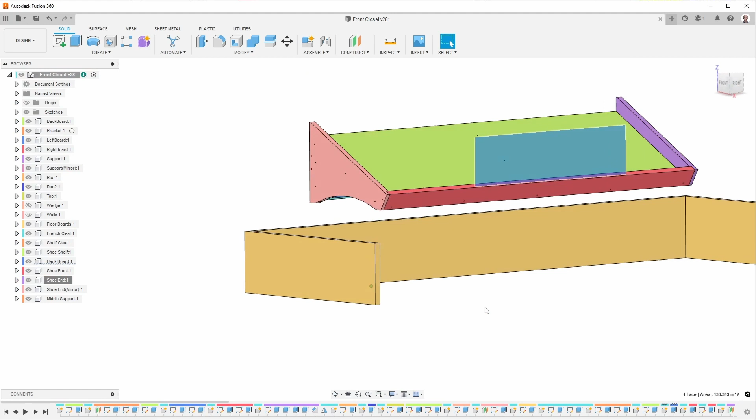So there's a lot going on here, and this is also driven by some parameters, as you can see here. So what I'm going to do is start from the beginning with a new file and then walk you through how I would create this with what I know now.

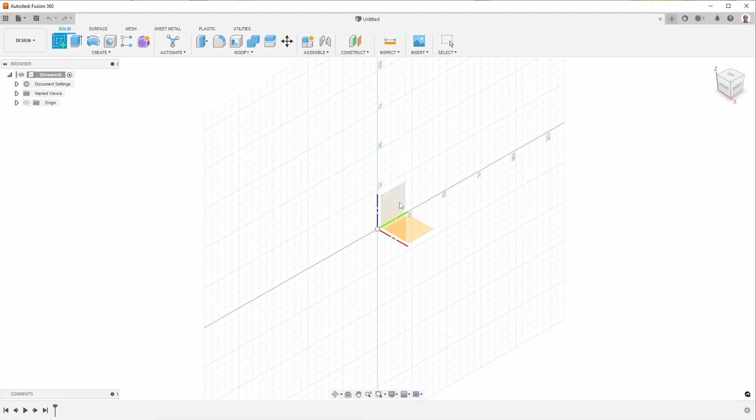The floating shelf is held to the wall with a French cleat. So I'm going to start by modeling the French cleat, and then I'll model everything else relative to the French cleat. So I created a sketch and I just chose one plane. It doesn't really matter which plane you start with. The other thing I want to do is, before I start drawing anything, change this to inches.

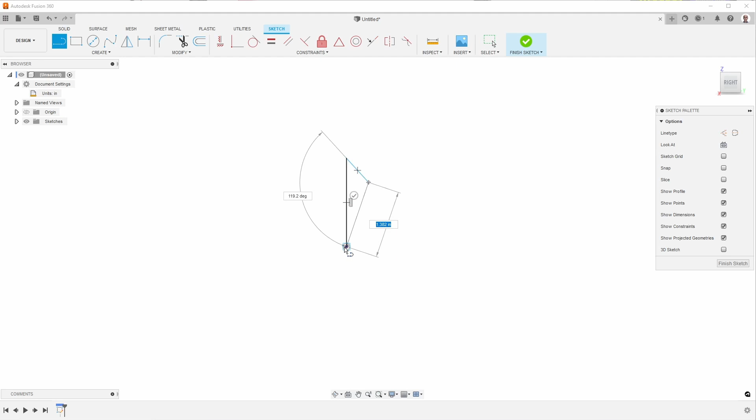And a French cleat is basically shaped like this. And what I did here, so that this will align here, is I hover over it and then move over here, and this will make it vertical. And then I can complete the sketch right there. I want to make sure that this is 45 degrees, so I will set that angle right now. And then I want to set some dimensions.

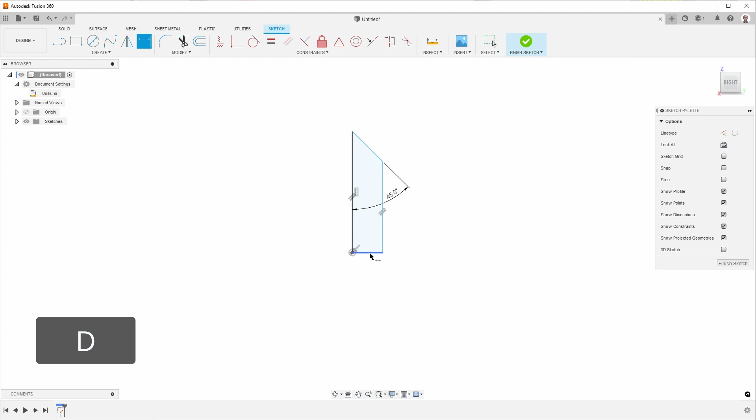Now for the dimensions, I want to start by using a parameter. So I'll create a user parameter called thickness. And I measured the thickness of my plywood, which is 0.7 inches. So I'll use that right there. And that means I can set this dimension here to be that value, like so.

The next thing I want to do is add a point here at the midpoint. You can see the triangle there. That indicates it's at the midpoint. Doing that will allow me to set this dimension to be 3 inches. Why 3 inches? I just thought that would be a good length for the midpoint of the French cleat. So that's why I set it there. So now I have the profile for a French cleat.

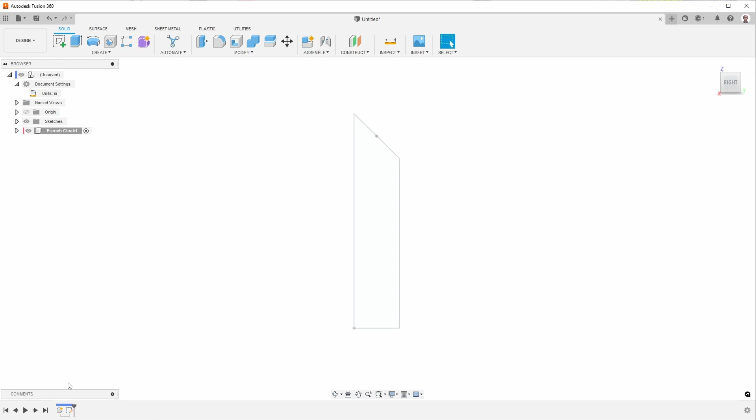Oh, there is one thing I just remembered, so I'm going to go back to that sketch. There's something I often forget to do, which is I want to make this a component first. So I rolled the history back. And now I'm going to give it a name for this component. I'll call it the French cleat. And now I want to move this sketch to be part of the French cleat.

So I'm going to edit this sketch again. One of the things I want to do is I do not want to have a point there because points are fragile. So I actually want to have this be about 1/8 of an inch short. And this is something that I did using my friend's table saw.

Basically, after cutting the French cleat on his table saw, then we went back and cut this off so that it's not a sharp corner, which means it's not going to be fragile the way a sharp corner would be.

The next thing I'm going to want to do is extrude this, but before I extrude it, I'm going to create another parameter, which is the width of the entire shelf. So I'm going to call this the shelf width, and I'm going to make that 48 inches, which is 4 feet.

The next thing I'm going to do, because it's really nice to use parameters, is say cleat width. And I'm going to make that the shelf width. Oops. Let me try that again. The shelf width. And then from that I want to subtract 2 times the thickness, because I keep pressing tab, but I want to press enter.

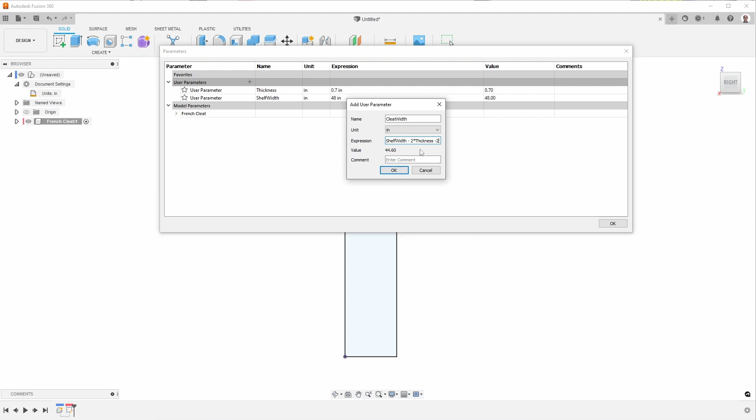And what this will do is, because I'm going to use the same plywood for the 2 outside parts of the shelf, this would make the French cleat exactly the right length for the inside of the shelf. That's a little bit too tight, so I'm going to make it so that we have 2 inches, and what that will allow me to do is to actually move the shelf left and right a little bit in case I want to. So that gives me a little bit of an extra buffer.

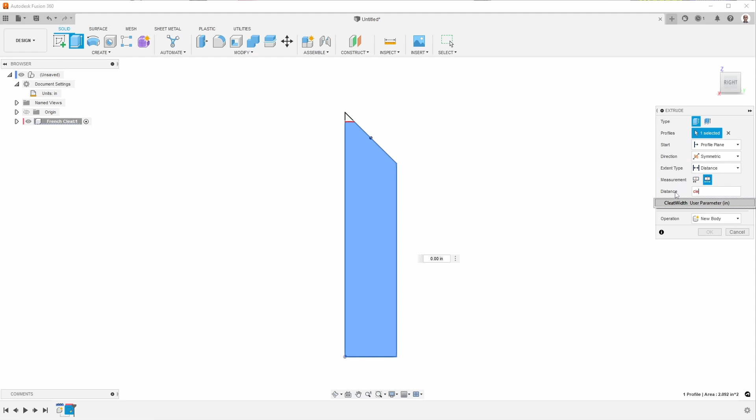So that means I can now go back and I can say extrude, and I'm used to just pressing E for extrude. Then I'm going to select this profile, not including the sharp part. I want to change this to symmetric, and then I want to change this to whole width. And then for the distance, this is going to be the cleat width. And of course, new body. So now, when we look at this, here we have the French cleat. The wall is going to be behind here.

Before I get any further, I should save this. So I'm going to go and say save, and I'll call this floating shoe rack.

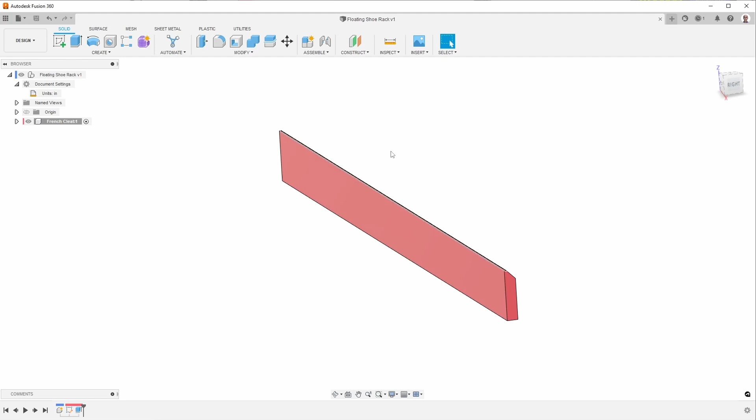Next, I'm going to create the French cleat that is going to be part of the shoe rack. So I'll call that the shelf cleat. And so I'll create a new sketch, use the same sketch plane. The other cleat is not a mirror image of this. It's actually this shape here, rotated by 180 degrees around this center point here.

To achieve that, I'm going to start by projecting. Actually, what I'll do is I'll show the sketch from here. And then what I'm going to want to do is project some of these things. So I'll change the line type to make sure it's on construction. And then I type P for project. I'm going to project this point. And then I also want to project all of this right here.

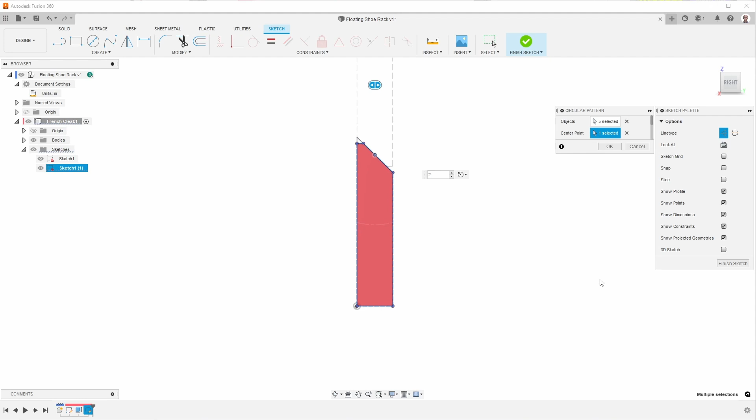Then I'm going to create a pattern. So I'll do a circular pattern. And the object is going to be this. I double-clicked on it. The center point is going to be here. I want 2 of these, and then I don't want that to be construction. So when I click on that, it should turn solid. It did not, but that's okay. I can double-click on that and then click here and make them so it's not construction. So now I have the actual cleat for the back of the floating shelf.

This needs to be wider, and I need an equation for that before I extrude it. I'm going to open the parameters again. The first parameter I want to create is something I'll call dado depth. The idea of this is I'm going to have slots, dados, rabbets, various other things that some of the boards slot into so that everything fits together really nicely. I'm going to make that depth 1/4 of an inch, which is approximately 1/3 of the thickness of the material.

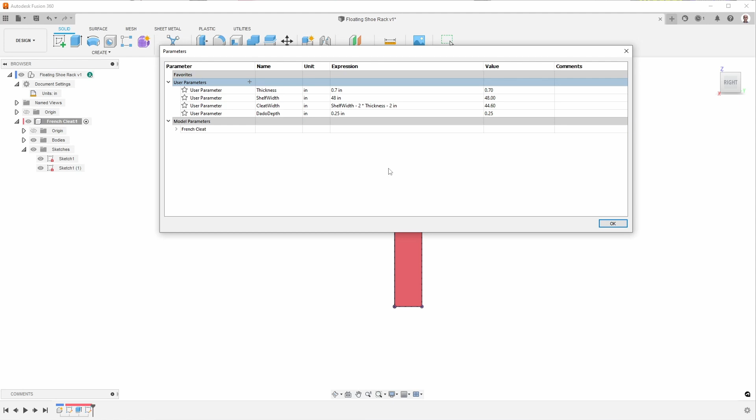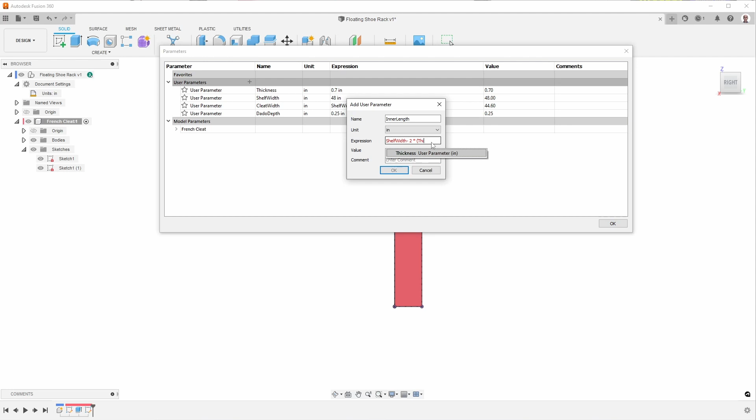And then the length of this shelf cleat is going to be the full length, and then I'm going to subtract the width of the 2 pieces of plywood, but not the total width of those 2 pieces of plywood, because I have to remove the dado depth. So I'll define this new one to be the inner length, and it's going to be the shelf width minus 2 times the thickness of the material. I keep pressing tab. And then from that I want to subtract the dado depth.

And I keep pressing tab because when I'm writing computer software, tab is auto-completion. Alright, so this is going to be the value that we want for the length of this new cleat. So I can then go here and say extrude.

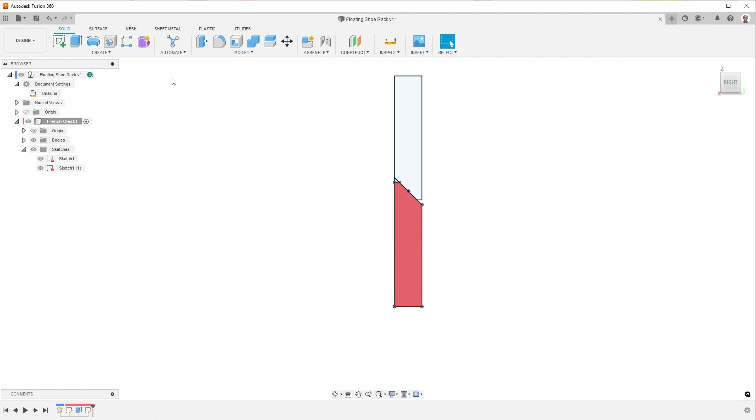Select this. Again, I'm going to change it to be symmetric. Whole length. And then this is going to be the inner width, or inner length. And now, if I turn off the sketch, we can close this. You can see I have these 2 separate boards.

And what I just realized is, again, I forgot to make a component. So I'm going to back up, and with any luck, I will be able to create this as a separate component. So shelf, cleat, and then I want to move forward one, take this new sketch, which is right there, and move it to here.

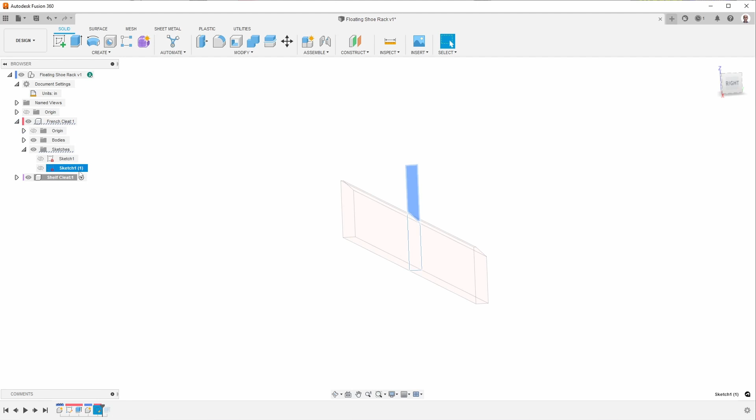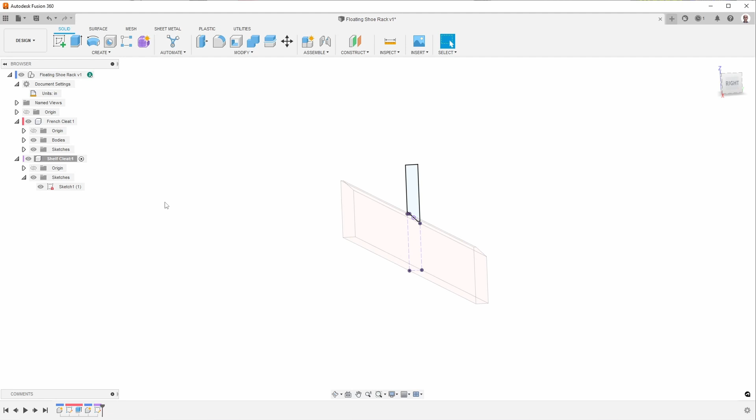Okay, it's not going to let me do that, so that means what I have to do, I'm not sure why I have to do this, but if I delete this, then I should be able to move that sketch now, which I can. So now this is active, and I will make sure that this sketch is visible. I will extrude again. And now all is good.

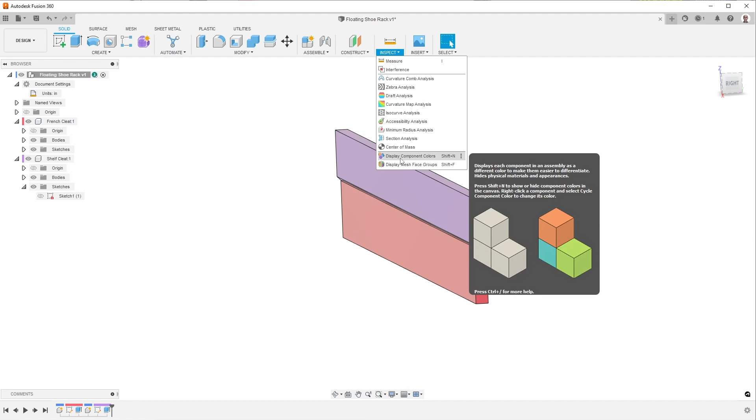Now this, by the way, is one advantage that I find to having the display component colors turned on. I can easily tell when I have not created something as a separate component when I should have. All right, so this is a good starting point. You can see there is room to move left and right.

At this point, what I want to do is start creating the sketch for the end component, for the side, effectively. There are going to be some other boards that come in between, but what I want to do is take the approach of a master sketch. I want that master sketch to be in the right position, so I'll start out by creating the component. Actually, now that I think about it, I'll keep this master sketch up here at the top.

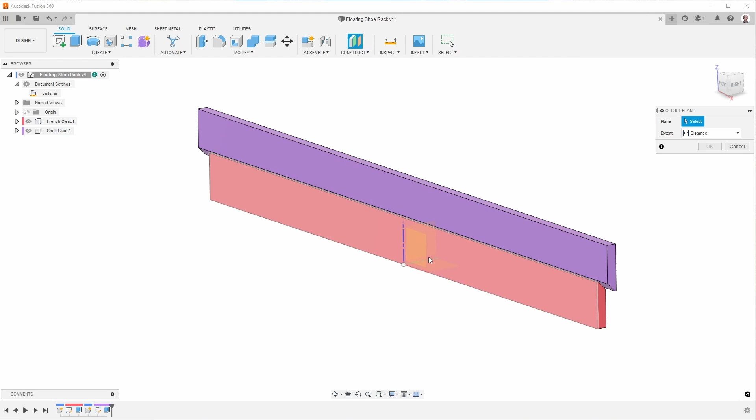So I have this already selected as the active component, and what I'll do is I'll create an offset plane. I want to create that offset plane from here, and then it's going to be the shelf width divided by 2. And that went in the opposite direction that I want, so I'll just change this to a minus, and now it's over there. Then I'll create the sketch on here.

I'll start with the diagonal board on which the shoes will sit, and then the piece in the front. So I'll go ahead and start creating some lines. Actually, I'll create a rectangle, and I'll use a 3-point rectangle. So I'll just get something kind of sketched in here, and then I'll start to add dimensions. So the first dimension I want is here. I want this to be the thickness of the material.

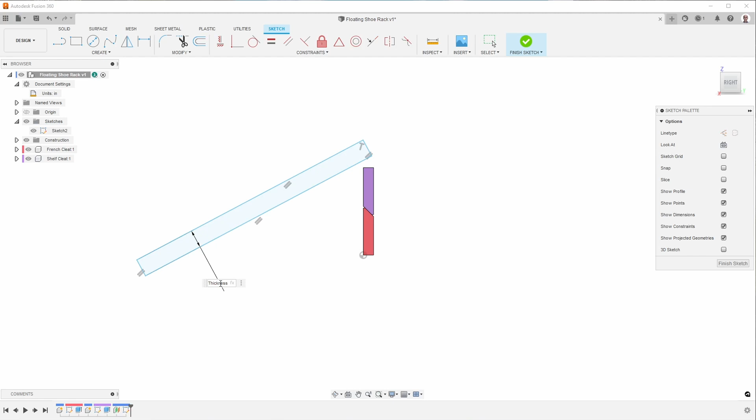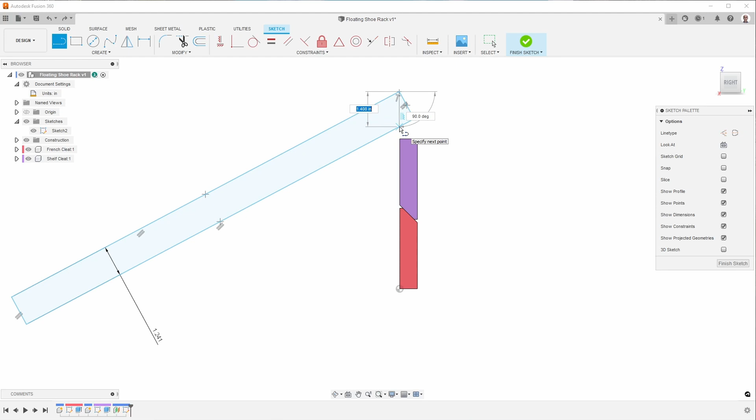Now that I think about it, what I want to do here is have another line that goes from there. Actually, I'm not sure why it just snapped. I'm going to undo. Okay, try a line again, and I want this line to go from here to here. And now that I think about it, I don't want to add the line next. You can see I'm kind of thinking things through. I'm giving you a little bit of an impression of what it's like.

So the first thing I'm going to do is I want to set this to 30 degrees. And so I'm going to just sketch in a line that I can use as a horizontal line. And then I can go in here and say dimension. Let's see, where's dimension? I always press D. So I'm actually not sure where dimension is. So I'll just go ahead and type D again. And then I'm going to make this 30 degrees here.

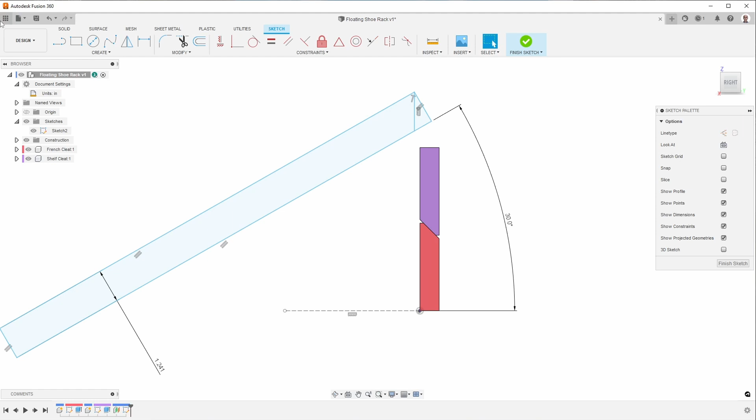Now that I've done that, I can go and add this vertical line here. And I don't want that to be a construction line, I want that to be an actual line. And then I want to start projecting a few things that I'm going to use. So I'll project this line here, because what I want to do is have, I'm going to move this over a little bit.

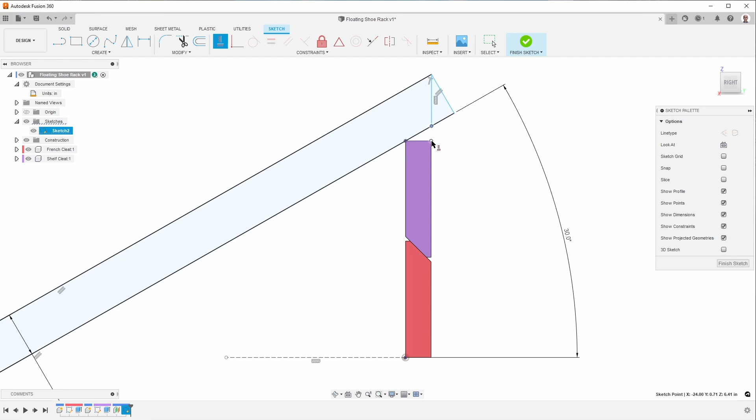So I want this point here to be coincident, like so. And then I'm going to move this over again, because what I want is this point here to be in line with this point here. Because we're not going to keep this on the material, I'm going to cut that off. And so that means the board is going to go like so.

Then I decided, after measuring some shoes, in particular my son's shoes, I'll press D and set this dimension to 14 inches, which is long enough for his shoes. He's 25 years old now, and he's quite tall, 6'2", so he has pretty long shoes. All right, so that's the board here, except I just realized I didn't set this to the thickness. Okay, that looks better now.

Then I want the board here, and when I create that board, again, I'll create a rectangle with 3 points. So I want 3 points, like so. Then I can add some more dimensions. So D is going to be the thickness again.

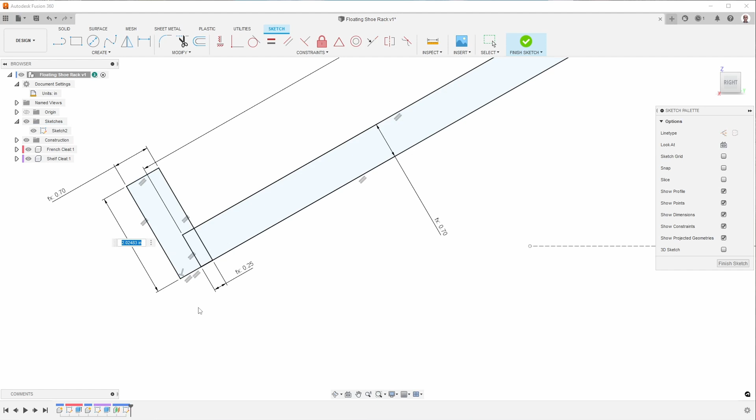So you can see this is going to be the front lip, but I have these overlapping here because I'm going to want to have a rabbet in here for alignment. And so this distance from here to here, I'm going to use the dado depth. So I'm using the same depth for everything. And then for this distance here, I'll just go ahead and make it 1.5 inches, which I think is going to look good, and it'll keep the shoes from falling off.

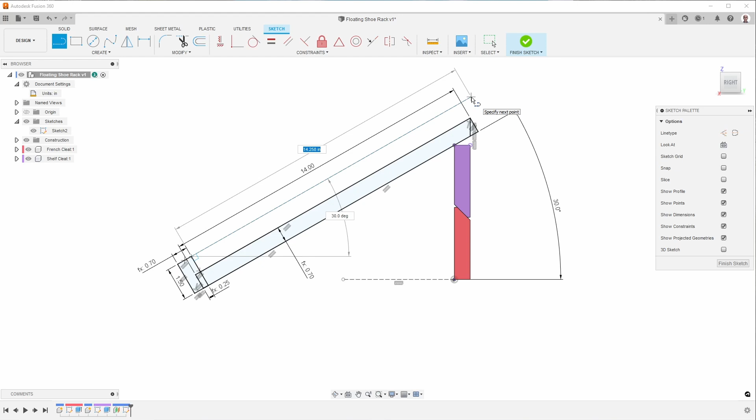Next, I'm going to start sketching out the side panel itself. As I said, these are the two shelf boards. And so I'll go back to line, and I'm going to want to have it basically go up to here. I'll worry about setting everything up later. And then I'm going to want to have it go down to here. So I'll make sure that that all works well, like so. And I said I'm going to do this approximately, so now what I want to do is have these two be collinear. So that's my basic shape.

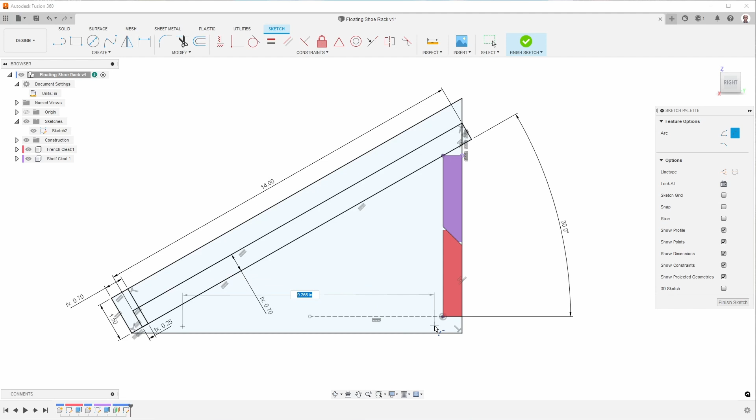But I don't like this straight edge. It looks a little bit boxy. So what I decided to do is to add just a curve. So I'll do a 3-point arc. And I'm going to connect this in a minute. So I'm just going to kind of sketch it in here. And then what I want to do is to have another 3-point arc, which is going to go from there to there. And that makes a tangent.

Yep. And then I want another one to go from here to there and also be tangent. You notice these two parts are not tangent, so I'll go ahead and make those tangent. It's a little kinked at the moment. Ooh, that's not good. Okay, so sometimes weird things happen like that. So what I'm going to do is I'm going to start adding some constraints. So I'm going to dimension this to be about 12 inches, I think I'll call it. And again, weird things happened. So I'm going to delete these and try to add them back in a way that works better.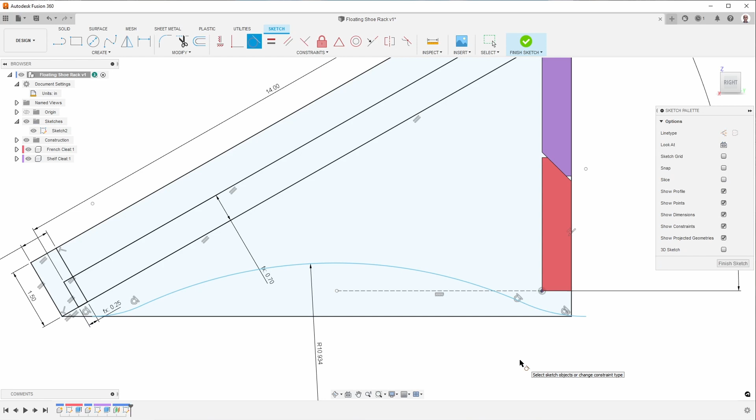So I'll go to the arc again, but this time I'm going to say tangent arc. So it'll be tangent to that. And then I can add that tangency. I can get close and then add that tangency later. Likewise, I'll make a tangent to that. And then this is pretty close. Okay, so now I should be able to make these two tangent. Yep. And make these two tangent. And that's good. I do want to bring this in a little bit. So this is moving things around a little bit.

Okay, now I'm going to add a couple other dimensions. These are dimensions that I figured out after some trial and error. So I made this 0.43 inches. And then I also made this distance here the same thing. So I'll just control click on this, and that copied it to there. So now these two are the same.

Then I need to set a radius for these two. So I'll set the radius of this to be 2 inches. And then this one I'll set to be 2.5 inches. It turned out that for whatever reason it looked a little better when it was 2.5 inches.

So that's pretty much it for the side panels. And we can go ahead and extrude it. That's not going to be the full story, but at least let's do that and get a start. So I'll create a new component. And I'll just call this side. And then I can extrude.

I'm going to have to select a bunch of things. But this is what I want. And then, now, for some reason it's not rotating. Okay, there we go. And what I want to do is make this thickness.

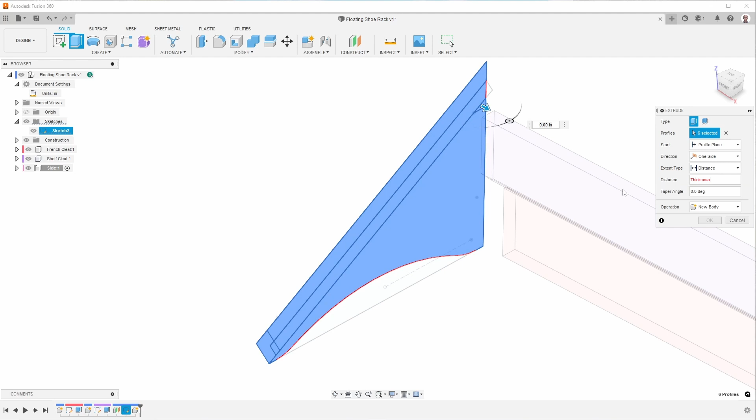Now, if I go here, you'll see that one of the issues is that we don't have the dados in here, and that's okay. What I want to do is finish drawing the other pieces, and then we'll go ahead and add the dados and slots. On second thought, I think I'm going to go ahead and try to just add those slots now, because we know where they are, because we've got the other pieces. And then once we do that, I'm going to use a different technique, I think, to create the boards.

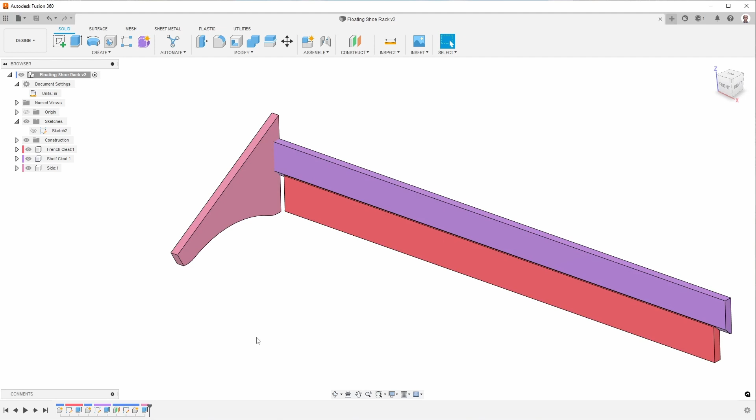So let's go and make the side the active piece. And then I'll sketch on here. And what I'm going to do is I'm going to show this sketch again. And then I'm going to project. Now, you'll see in a minute why I'm doing this. What I want to make is these constructions, so I'll double click on that.

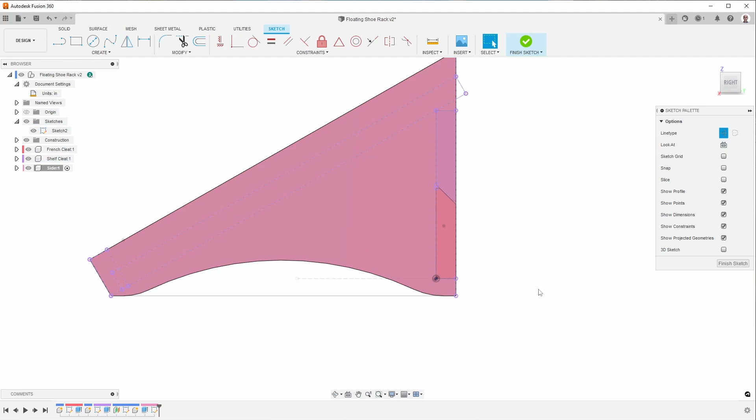So this is where we need one dado. This is going to be a whole thing here, so I'll click on this. And then I'm going to click on these, and then I'm going to need to connect a few things together. And I'll click on this side. Likewise, I'll do these segments here. Okay, so I'll hide that sketch, and actually I'll isolate this so we can just see this. And it's a little hard to see the sketches because of the colors.

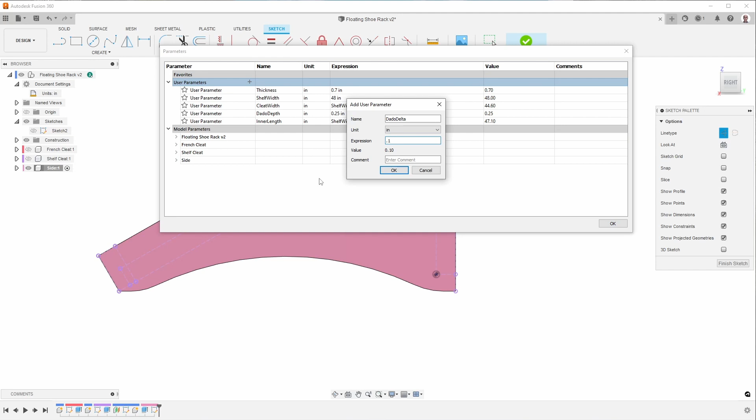The reason I created these sketches is because I want these slots to be a little bit wider than the actual material width, because otherwise I find that they're too tight. So I'm going to offset, and what I want to do is first create a parameter that I will call dado delta. And I'm going to make it 0.1 inches, which is pretty small.

Okay, so now what I can do is I can go to, for example, here. I double clicked and I thought it would select it, but it doesn't know the connection anymore. So I'll just go ahead and select these four, and then I'll say offset, and I want this to be dado delta. And I want to zoom in to make sure it went the right direction. It went outside. This is showing as construction, but I don't want it to be construction. I'm not sure why it's showing up. So I'm going to undo that and then try this again.

So I'll say offset. Select the different ones. Okay, so now that will make the slot a little bit wider. And then I'll go ahead and do the same thing for the other ones. So I'll say offset, and then I want to do these as well. Now that offset went the other way, so I'll flip it, and now I can type. So actually that tells me that I have to do minus dado delta. Zoom in, make sure it's okay. Yes, it's outside in both directions, so that one's good.

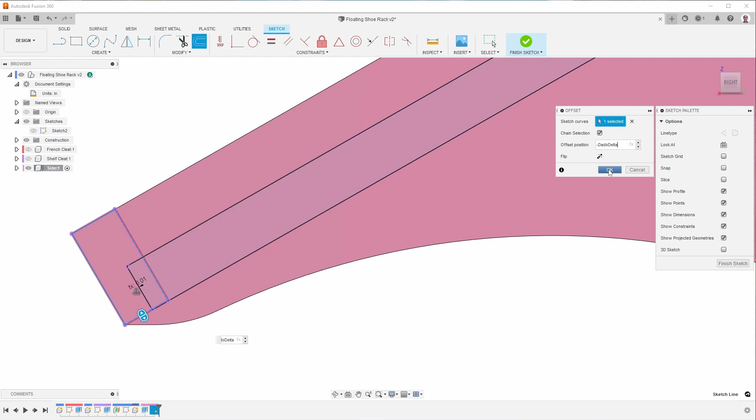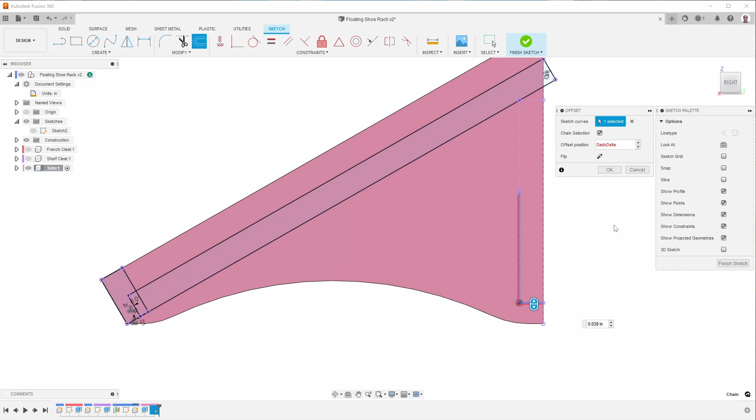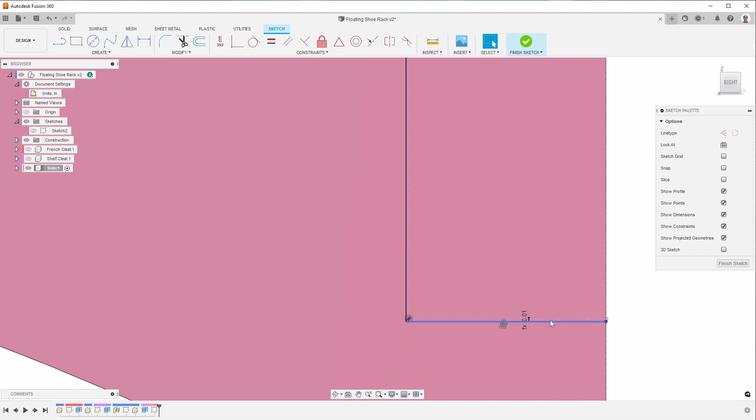And then we want to do the same thing here. So I'll go ahead and say offset. I'll select these. And I'm going to have to connect more later anyway, so I'm not going to do all of the ones that I need. For some reason, I'm not able to select that. So let me try this again. Okay. And it's not allowing me to multi-select. That's okay. Just make sure it's outside. Here are the dashed lines. Yes, it's outside. And then I'll offset this top one as well.

Okay, now it's not complete, so I'll press L and connect the lines, and then connect these two lines there. And that is giving me what I need.

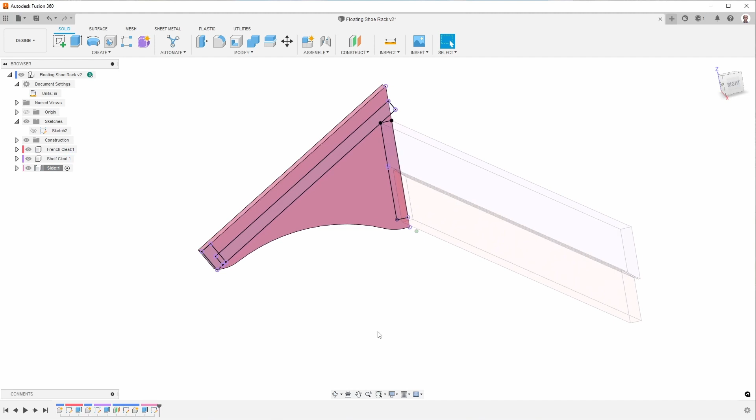Now just remember there's something else I'm going to want. Let me show these, unisolate this. So what I have right now is these two pieces here, and I thought it would be stronger if I had another piece that this was attached to and this is also attached to. And then this piece would also be resting on this.

What I'll do therefore is go back in time in history. I have to go there to my master sketch, so I'll edit this sketch. And as I said, I want another board here. The other board is going to, I'll just go ahead and say rectangle. So it's going to go from here down to not quite all the way.

So I need to project again, so P, and I want to make this construction. I need to pick this up. What that will allow me to do is make this collinear, like so. Then I also want to have this constrained to this here. Didn't allow me to do that. Okay, it was already constrained.

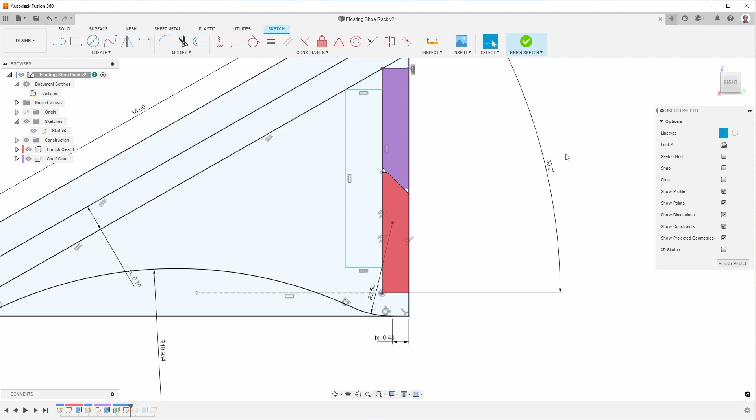So I'll set the thickness of this to be the thickness of the plywood. And then I'm just going to make this a little bit shorter, because it doesn't have to be the full length, so I'll make it a quarter inch shorter as shown.

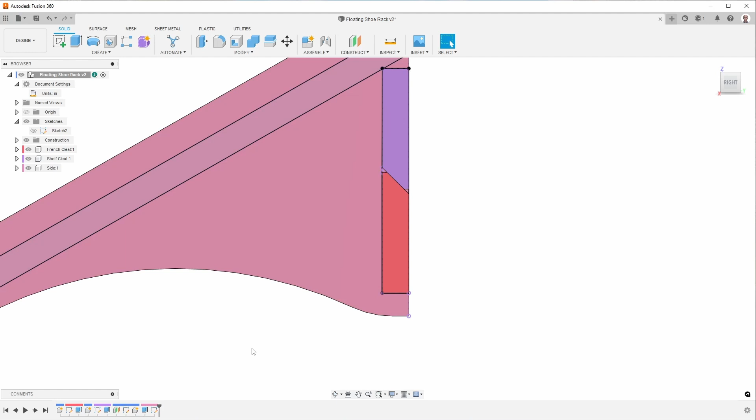So now I can go back to where I was defining these slots or dados or whatever you're going to call them, and I need to add one more. I'll go into that sketch, and then I need to show this sketch again. So now I can project, making sure the line type is construction, and I'll double click on this, so that's going to pick up that as well. And so that means I can also add that as an offset.

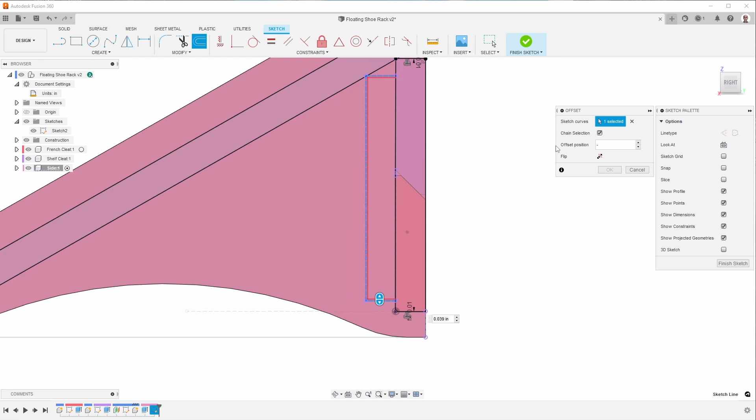Make sure I uncheck this. So grab those three, and then minus the delta. And again, making sure that it's here, the dashed line, so yes, it's outside.

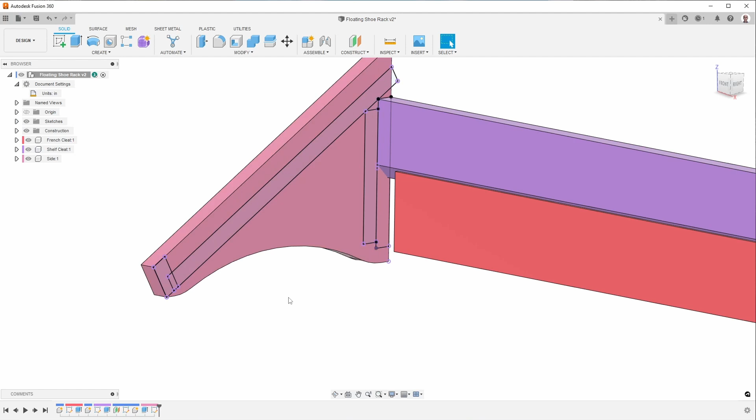So at this point, you can see that I have all of the sketches that I need to be able to create the dados or the slots or whatever you want to call them. So now I'm going to go back to the side. I'm going to isolate it so I don't see all of the other things.

And now I'll say extrude and select all of these areas. Oops. Okay, what I discovered is I'm missing a line.

So I have to go back here, edit the sketch. And I seem to be, I have to zoom in. So somewhere along the way, this area here is not considered to be filled. So what I'm going to do is delete this line, and then make sure that when I create the line, it's actually going from here, rather than the dotted section, all the way down to the solid line here. And now you can see it changed color, so that means we can extrude.

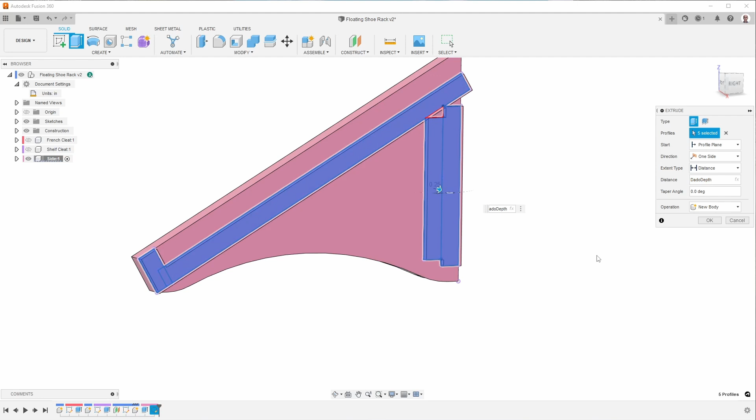So I'll go back to here and try extruding again. And so now I should be able to select all of these, which I can. And then the distance will be dado depth. And as you can see, it went the wrong way. I didn't check that carefully. So I want to go minus, and I want that to be cut.

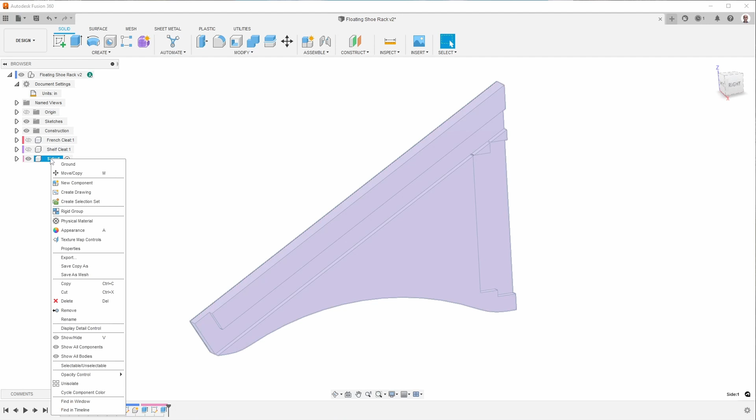And there we go. If we unisolate, you can see that we have actually cut more than we need to cut because this does not go all the way across. Let me check my sketch. You can see my sketch doesn't have that ending point.

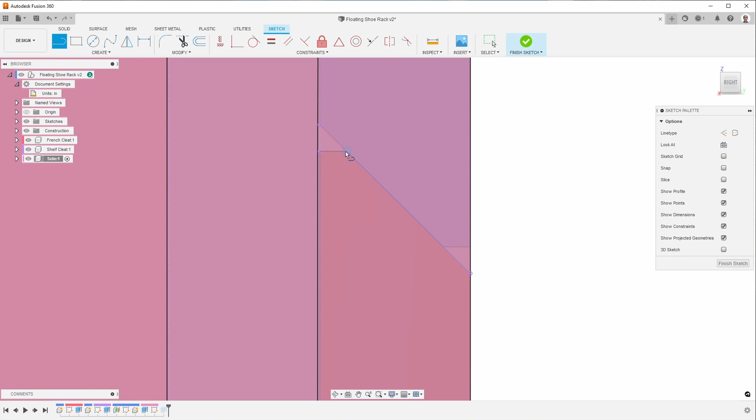So I'll go ahead and edit the sketch. And then what I need to do is project this right here. So I'll say P, and then I'll project this line here. And actually what I'll do is project this line. And then I need to add to that line to extend it the rest of the way like so. And I think at this point it means I can update this to exclude that section. And now you can see that is pretty much what I want.

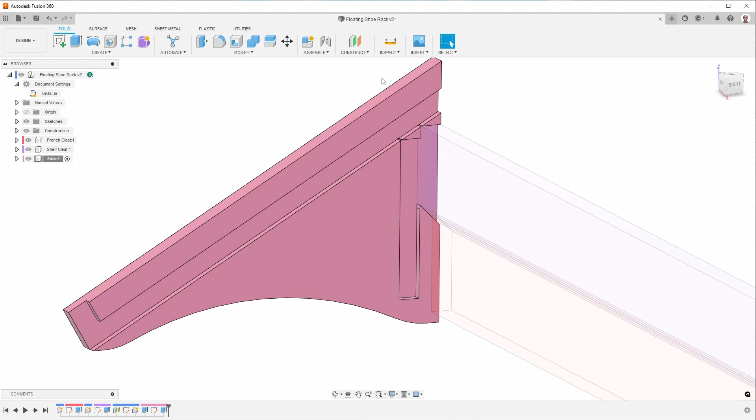There are these extra pieces up here that I could probably get rid of if I wanted to, but I'll keep them there for now. Well, actually there are some extra things. Let me back up to try to get an idea. Oh, there's probably something that I didn't capture. Yep, there's another segment that I need to add.

Okay, that looks better. So I didn't need that extra bump, because that would interfere with this board here.

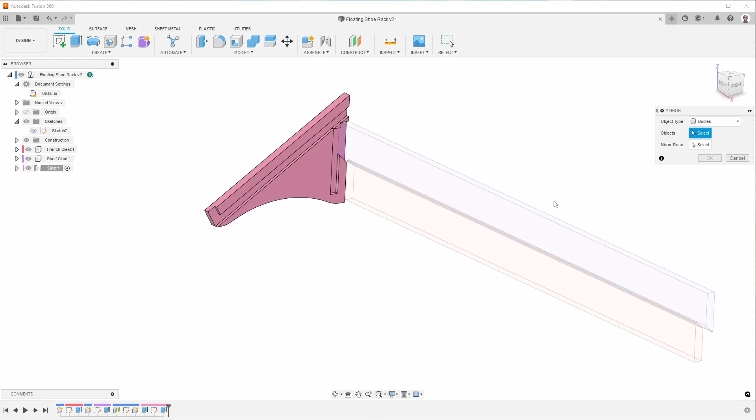Okay, so now let me start adding the other boards. When I create them, it would be nice to extrude them from this surface to the other side. So I'll start by mirroring the side I have. I'll select mirror, select this component, and mirror it around this plane. You see that creates our mirrored side. If we select the top, you can see we have those two mirrored sides. So I'll create a new component for the top.

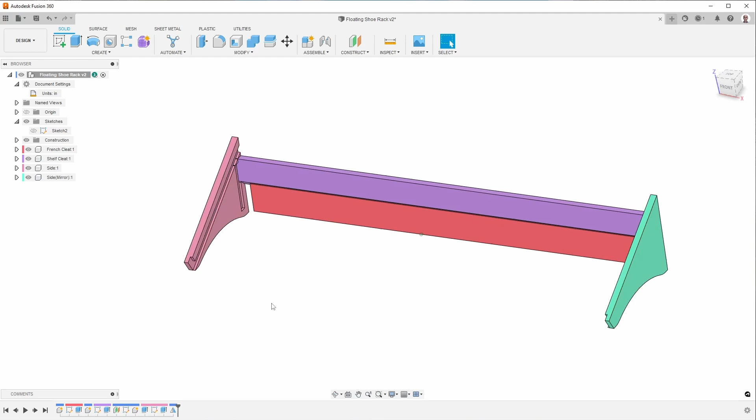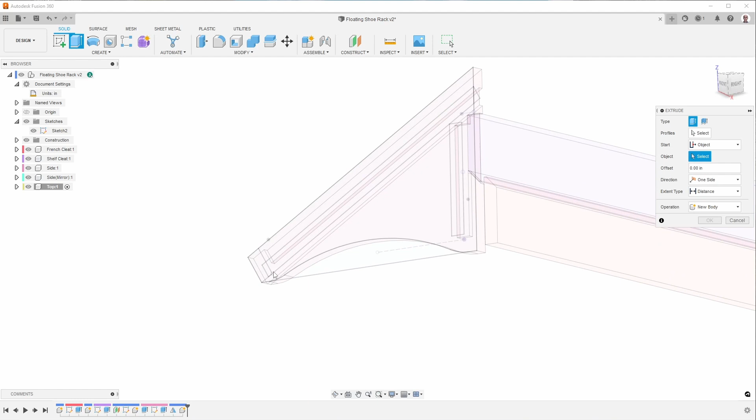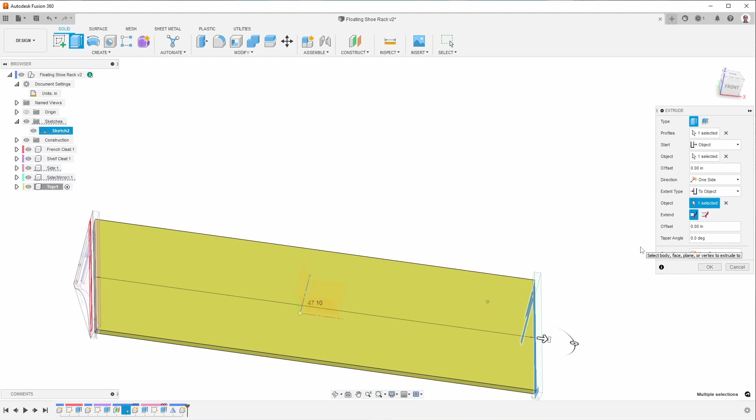I'll enable this sketch again, and extrude. The start plane is going to be this surface object right here. The profile is going to be this profile right here, and the destination is going to be this slot right here. And you can see that created my top board, which is pretty nice. Using a master sketch like that makes this a lot easier.

Now I'll do the same thing for the front. I didn't need to activate it, but that doesn't hurt. So I'll call this component front. Then I'll extrude again. For the profile, I'll select right there, and instead of the profile plane, I'll select object, so that is right there. Then the destination is right there, and now I have my front board.

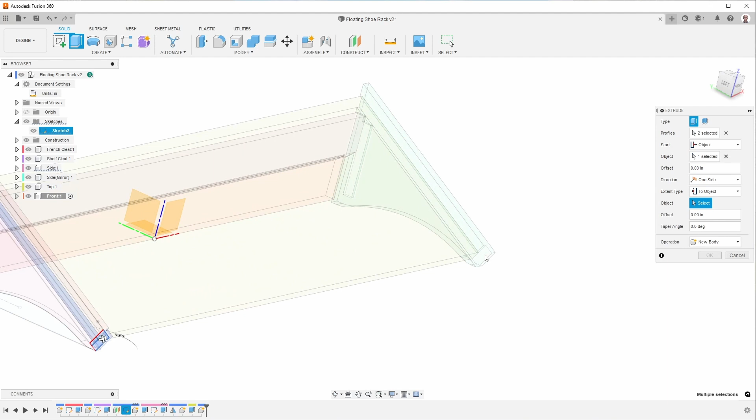Oops, I just realized I want to change the selection. I do not want to include that, because this is the rabbet that I'm going to put in there for joining those two boards together.

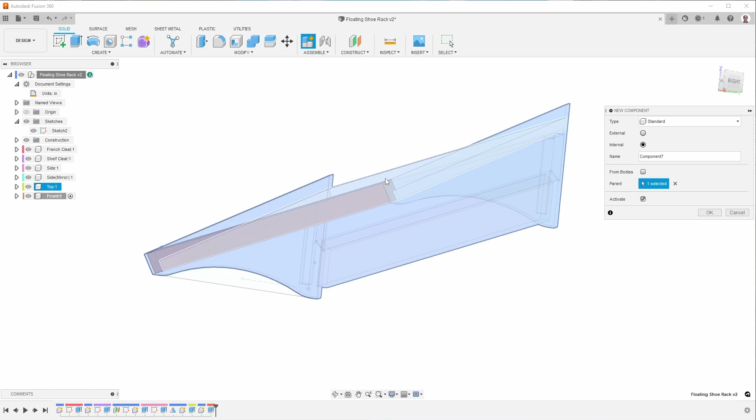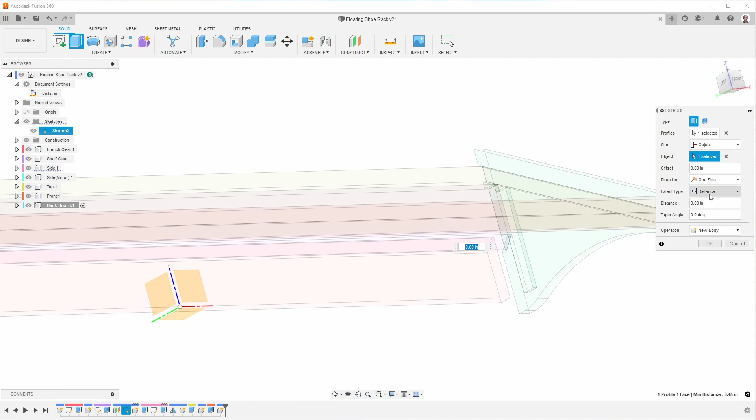Okay, next I'll create the board that is going to go in here, which I'll call Back Board. Extrude, I'll select the profile, which is this one right here, from there - yep, that's correct - to there. And you can see it goes in not all the way.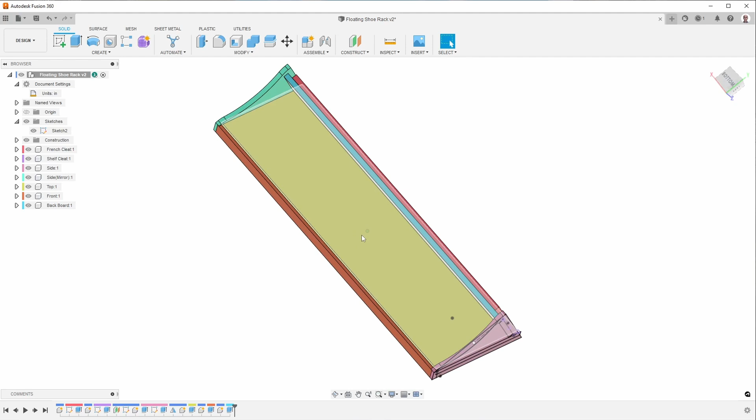Okay, so we're nearly done. There's one more thing I want to do, which is add a center support. Because this is nearly 4 feet across, I'm not convinced this is going to be strong enough. For shoes it's probably fine, but I decided to add a center support anyway, which will make the design a bit more involved. There are some other things we'll have to deal with, but I'll show you that in a second. Oh, and it's been a little while since I saved this, so I'll go ahead and press save.

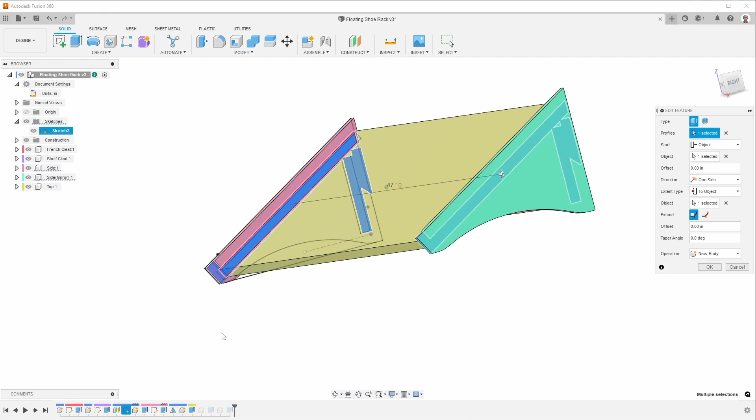I was just looking at this and happened to notice this gap here, and that's when I realized that when I made the top board, I didn't include the extension to go into the rabbet of this part here. That's easy to fix. I can click on this object, then click Edit, and include the part that I was missing before. And now that's all the correct dimension.

So it's good to check what you've done to make sure that everything looks okay, and probably check it multiple times before sending it to the CNC machine for cutting.

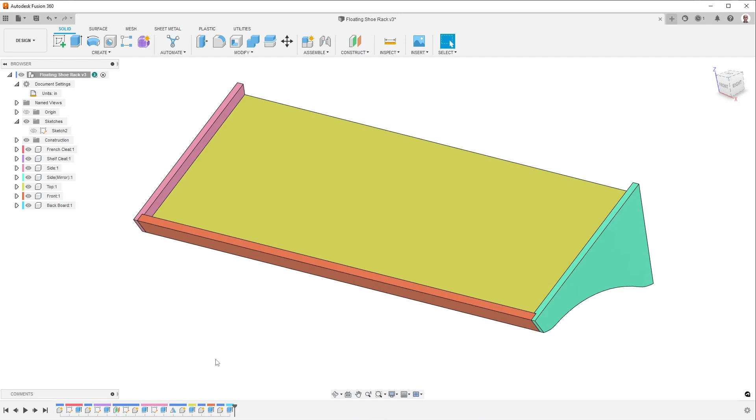Now before we get to the center support, there's something else. I decided I would hold these together with screws while the glue is drying. To make that easier, I decided to pre-drill holes all the way through with a 1/8-inch diameter drill, and then chase them with a countersink, which you'll see in the second video where I do the manufacturing.

So let me go ahead and back up in history to just this side here, and then isolate that, and then we can put in the holes. The way that I did this, I'll show you right now. I guess I forgot to start a sketch, so I'll do a sketch on this plane, and then I'm going to project this line here, as well as that line, at least to get started.

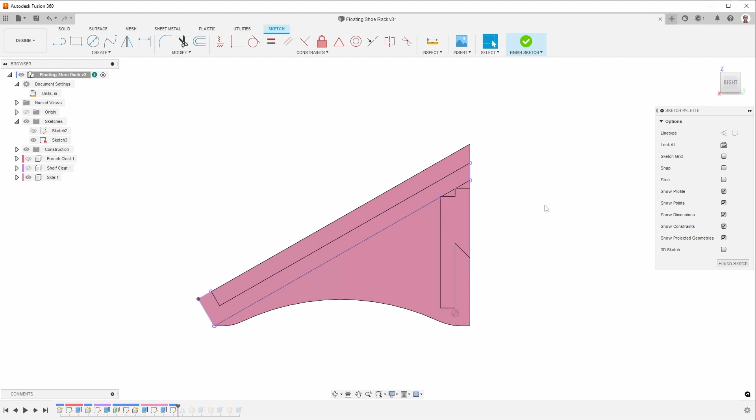I'm not going to show you all of the holes because that's a lot of holes. What I want to do is have a construction line that I draw from here to there. You can see there's a little 90-degree symbol there, so that means this construction line is now right through the center of that slot. Then I can add some circles, turn off the construction, and add some circles that are a lot bigger than I need, like so. This one is right in the center.

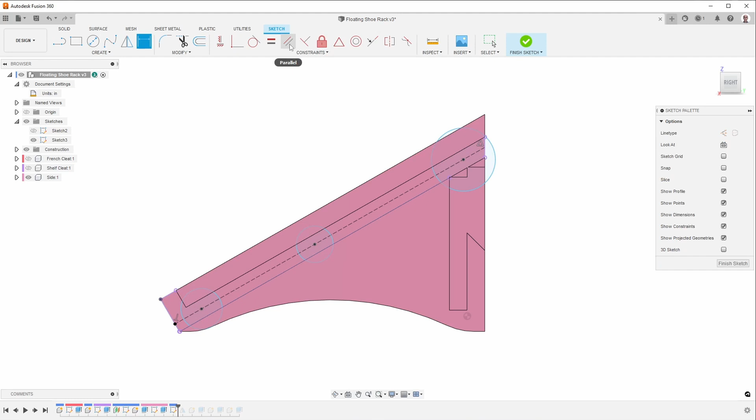Once I've done that, I'll go ahead and set the dimensions. Actually, before I do that, I want to make them all equal. So I'll use equal and make this equal to that, this one equal to that, and then I can set them to be the size that I want, which in this case is 1/8 of an inch. And those are the holes.

Again, I'm not going to do all of them right now. Then I'll just say extrude, so E, and then click on each of these, and then say to object, like so.

Now I can have the CNC machine drill these all the way through, and that will turn out really nicely, so that when I come back in and drill through from the other side with the countersink, it'll drill through these holes and into the mating piece of plywood. So that'll be a great starter and help keep things from splitting.

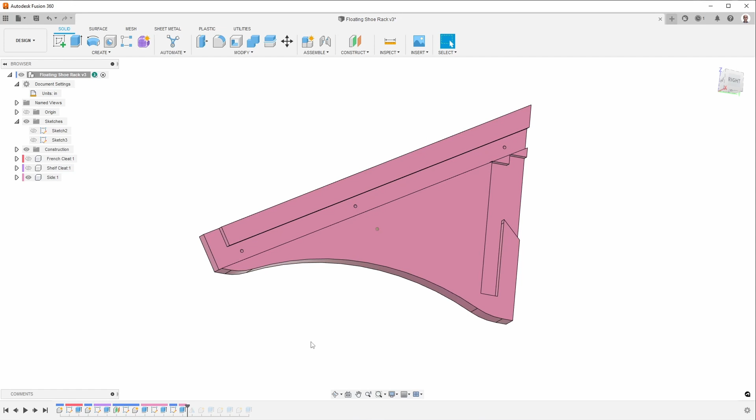So I will move forward, and the thing you'll notice is because I rolled back in history, those details are now in the mirrored image as well.

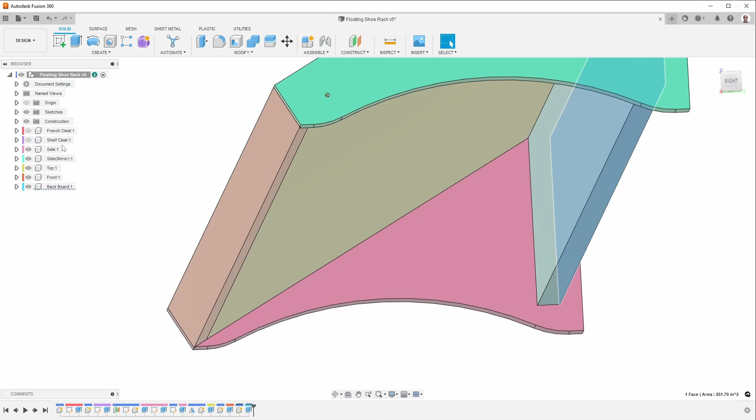There's one other thing I need to do to be able to make this on my CNC router. If you look right here, we've got a situation where there's this part that has square corners that needs to go into that slot. Let me go ahead and isolate it. We can't do that with a CNC router because there's no such thing as an end mill that can cut a square corner.

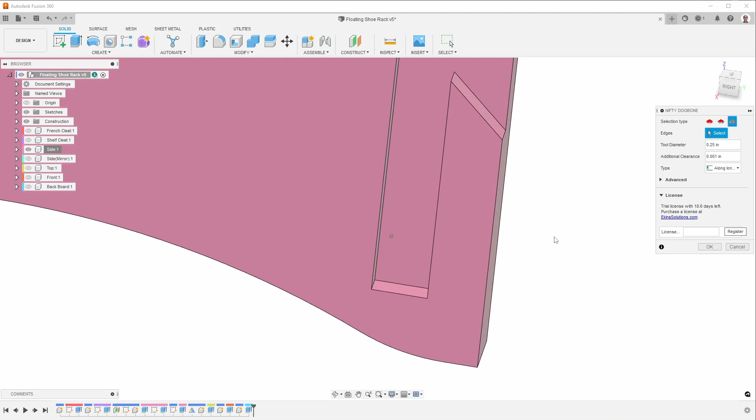So I have this program that I learned about called Nifty Dogbone, and it allows me to go in here and select the corners. For some reason I can't do that all the time, I'm not quite sure what's going on. I'm going to close this and then open it again because I had that problem before.

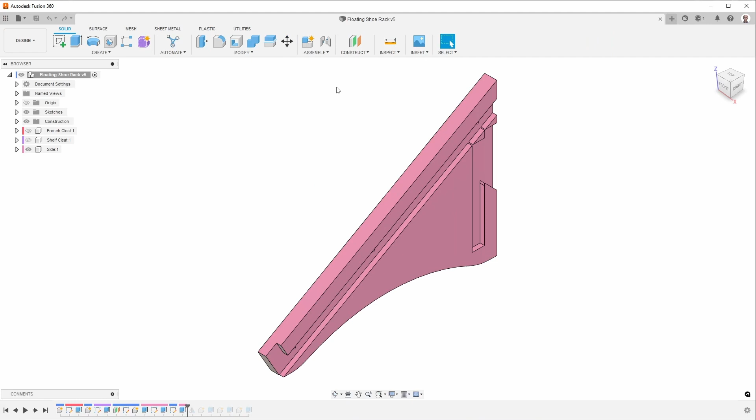So let me modify it with Nifty Dogbone. Select this over here. You can see I need to buy the license - I've been using the trial version. I used it for this project and liked it quite a bit, so I definitely want to buy a copy.

So you can see when I clicked on those two edges, I had it set so that it would - you have different options. I set it to this, no, not that one, along the long side. Not because I needed to in this case, but just because I had to choose one option, and that seems fine. You're not going to see this at all from the bottom or the sides or anywhere else because this is going to be underneath.

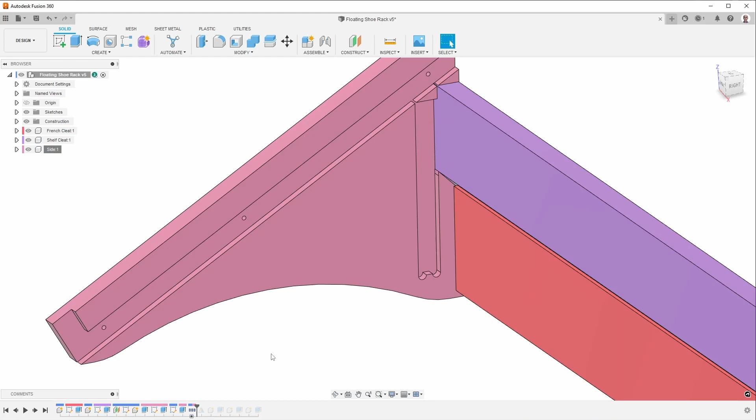But once I've done that, and if we unisolate this and then move forward, you can see how this will provide a place for that board to slip in, and we won't have any problems with not having square edges.

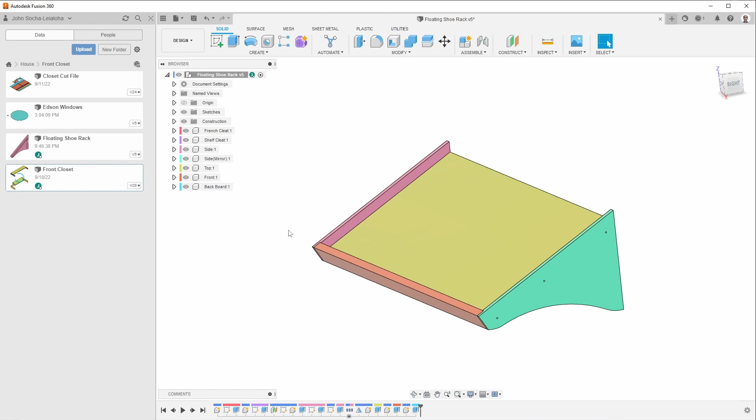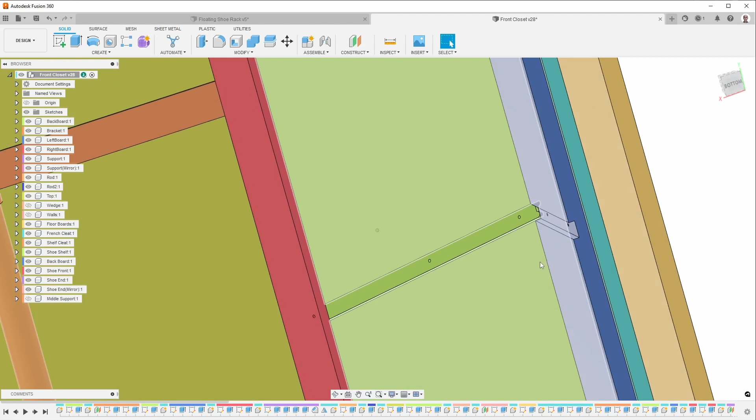So I mentioned that I also have a center brace. Let me go ahead and show you that. If we look at the full version that I did, you'll notice first of all I have more holes in here, but then I also have this center brace here. Again, I'm not sure I really need it. If I hide that, you can see that there are also dados or slots in these two parts here, and I have dog bones in this one as well.

So this is what I actually sent to the CNC machine, and this is what I'm going to be showing in the next episode. I won't continue drawing this because I think you get the idea, and this is already a fairly long video. I hope you found this episode to be useful.